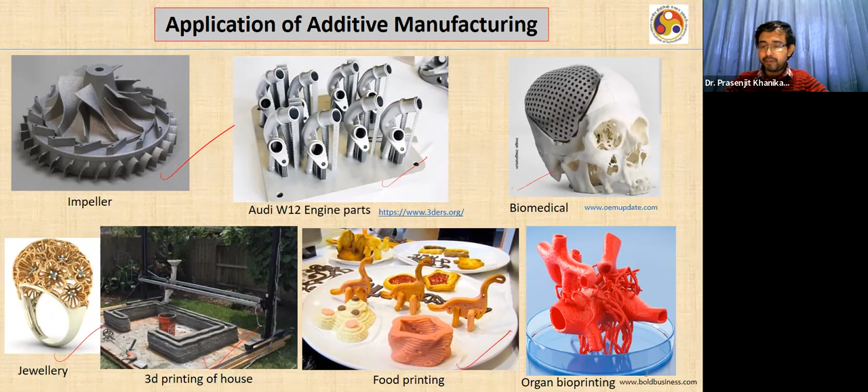And then a very interesting field is organ bioprinting. There people are actually printing organs with biological materials. So I'm sure that all of you are aware of this. I will just show you different kinds of metal 3D printing. There are also different kinds of polymer 3D printers. So I'll just show you a video.

Is the video showing? I mean, voice is not required, but the video is going, right? Yes, yes, indeed. Okay.

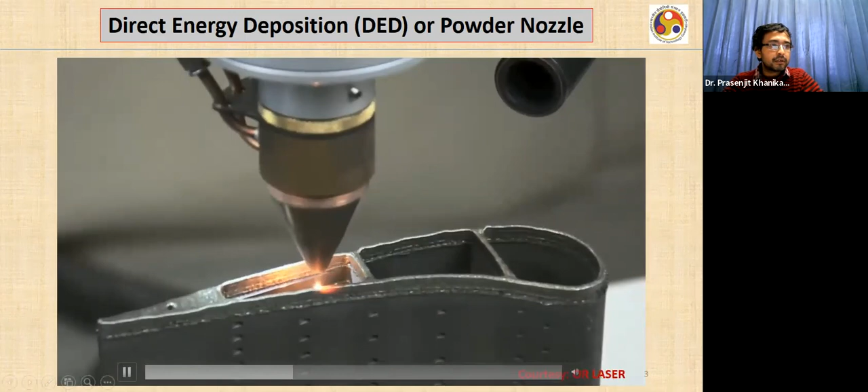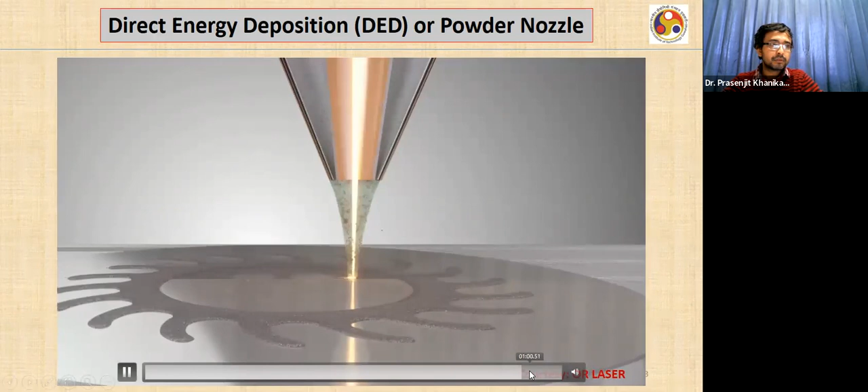Sorry, this is one method that is called direct energy deposition or direct metal deposition, or it is also called the powder nozzle based technique. So you have a laser. If you can see that light inside, you have a laser, and then you have metal powders coming from this nozzle. So that is one technique.

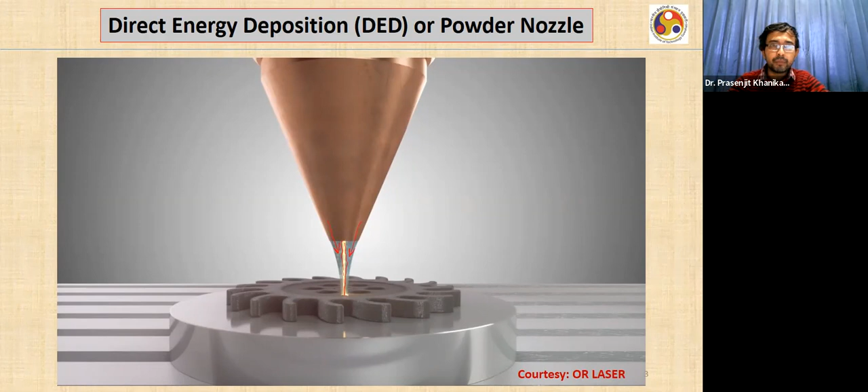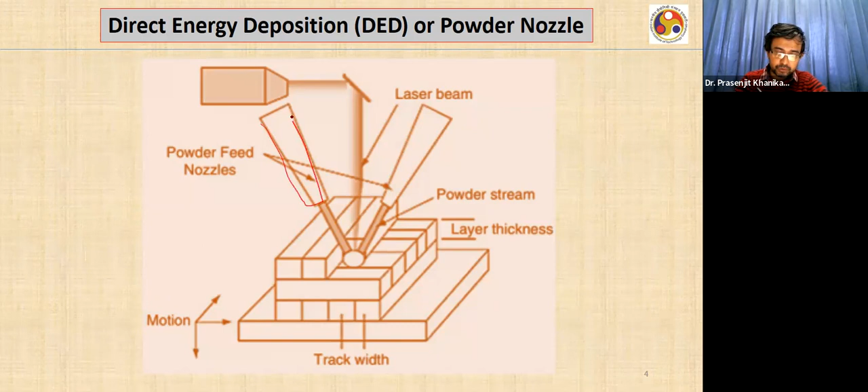But the printer we have in our department is a different one, because for some complicated shapes this doesn't work. But this is better for repair work compared to the other technique. So if you have, let's say, a gear or that kind of part, and it is broken and you want to repair it, this is a better technique. This slide is not very important, but again, they're showing the powder nozzles. You have nozzles here and here. There can be more than one nozzle, and then you are building the part.

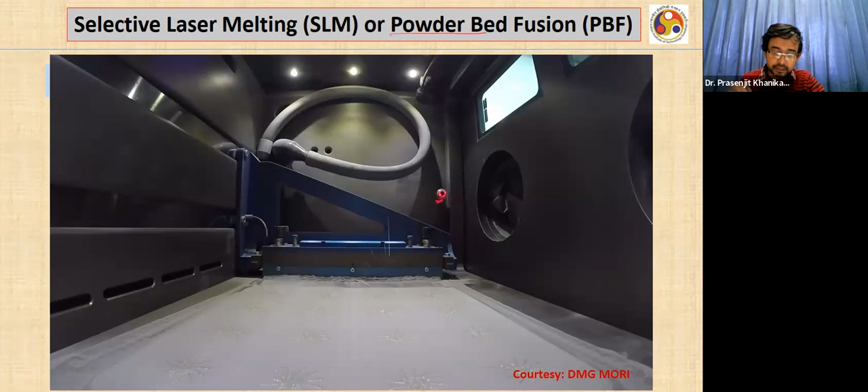But another technique which we are more interested to study, because our metamaterials can be made by this technique, is called selective laser melting, SLM, or powder bed fusion. The other one is called powder nozzle because the powders come from a nozzle, but here we have a powder bed. So this is the bed, and you have powders. You cannot see these powders; they are very fine, at the micron level, let's say 50 micron, 30 micron powder size. So this is again a video.

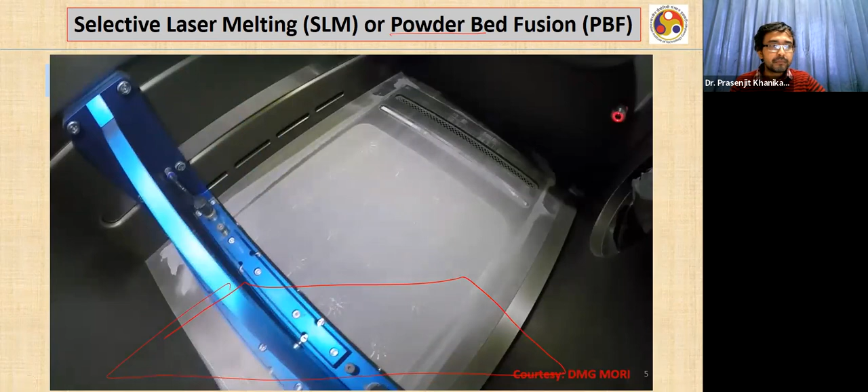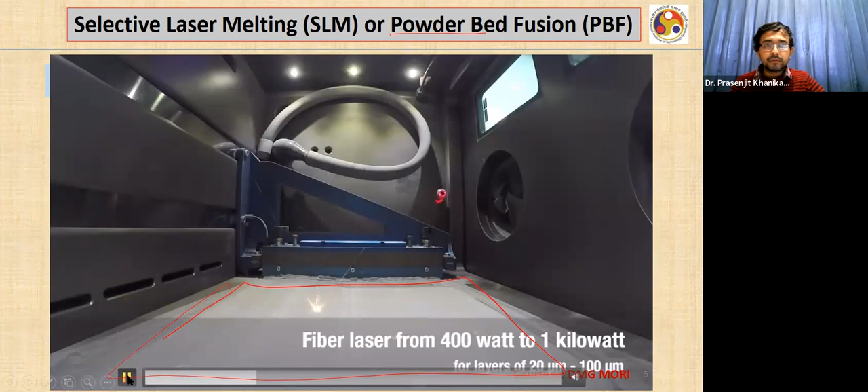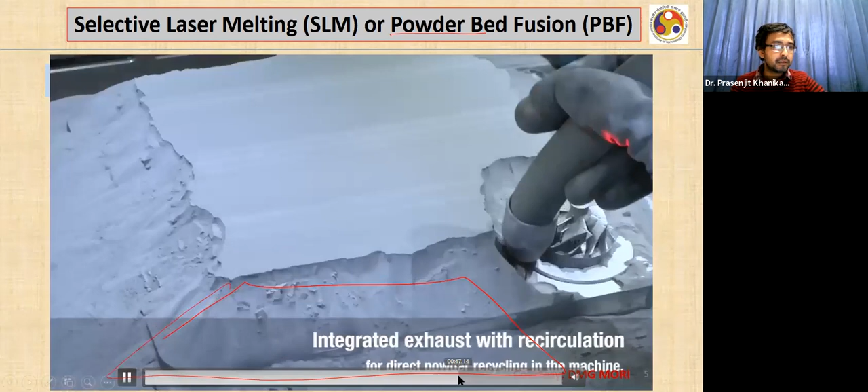This is the product we are making, let's say metamaterials or whatever product, a gear or whatever. This bed will go down. After one scan of the laser, this is the laser pointer, the recoater mechanism works. After one scan, like the wiper of a car, the recoater will go and remove the extra layer of powder. But anyway, we don't want to discuss the mechanism much.

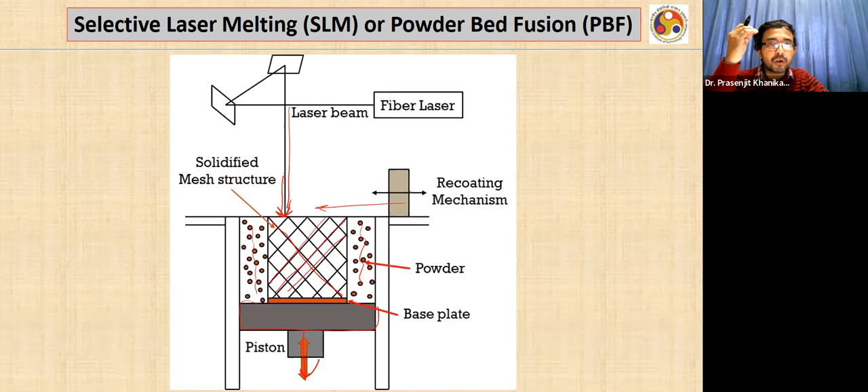But what I wanted to tell you is that selective laser melting or powder bed fusion is a better technique in terms of complexity of parts. Higher complexity can be achieved here. There are different kinds of classifications you will get in textbooks. This is one. This may not be exhaustive; there may be more techniques, but we are only focusing on metals.

As I told, we have SLM, sometimes called SLS as well. I have shown first DED, which is powder nozzle, and I have shown SLM, which is powder bed fusion. There is another technique which is also mostly powder bed, but it uses an electron beam rather than the laser. So this is another technique. But we are more interested in SLM because we have the printer in our IIT Guwahati.

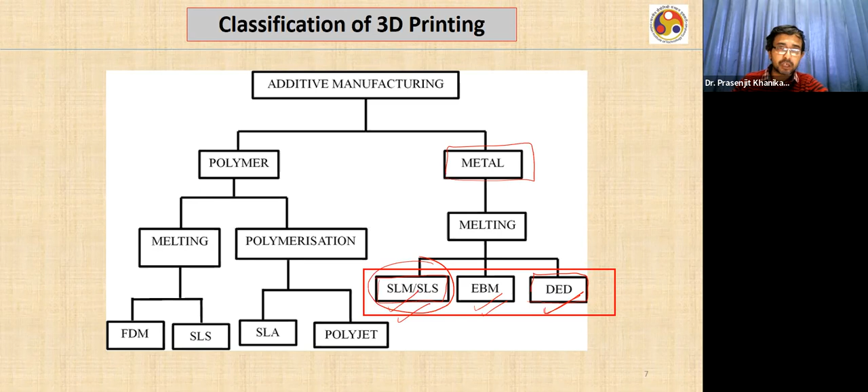So we have the printer, although it is not installed, and also we can make the metamaterials with SLM. EBM also can be used, but that is an even costlier machine, and there are some advantages in EBM. There are, I think, very few EBMs, electron beam melting machines, in India. So I will go quickly. We don't need to understand all of them.

I'll just go quickly. What are the process parameters in powder bed fusion? That is the technique we are interested in. So in powder bed fusion, these are some parameters. Let's say laser related parameters: the laser power, spot size, pulse duration, pulse frequency, and then how you scan it to make the part. Scan means scanning by the laser. So there are some parameters.

What is the speed of scan? What is the spacing of scan? And what is the pattern? Like you are doing like this, or you are doing it, let's say, a little differently. You can do that kind of scanning as well. So those are very important. And then also, what is the particle size, that powder size, what are the material properties of the powder, and then temperatures.

Why are these important? These are very, very important because these 3D printing companies took years to decide on these parameters. Let's say one very common material, SS316L, that is stainless steel 316L, is probably the most common material for metal 3D printing. For that material, what powder size, what laser power, what scan strategy will be good. So these companies did research for maybe a few years to get an optimized value.

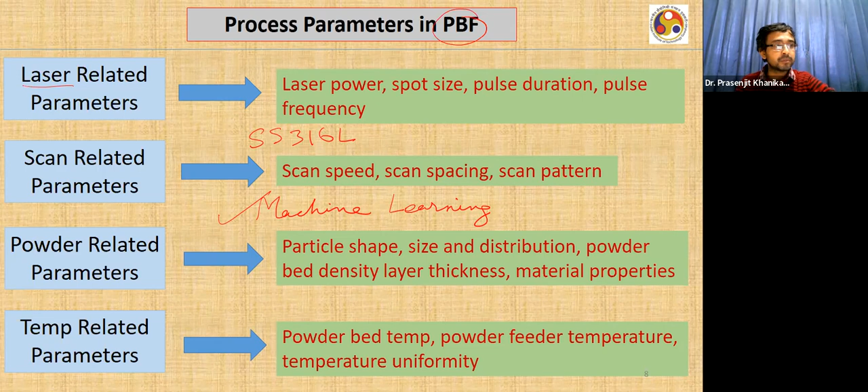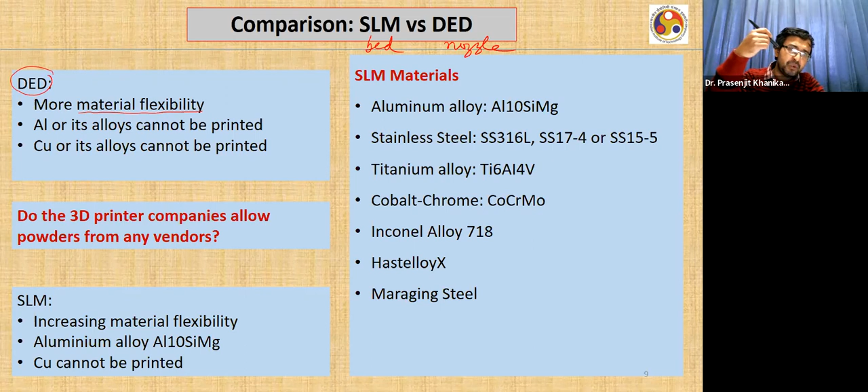So now again I'm coming to this comparison of SLM and DED. SLM is the powder bed. I'll write bed here. And the other one is the nozzle, the first one I showed, where there are no powders on the bed. So the important point is that you have more material flexibility in the other technique, the nozzle technique. That means you can actually use different kinds of materials. But here the material flexibility is not much. You have only special kinds of materials.

Let's say one common material, as I told, SS316L, this kind of stainless steel, titanium alloy, cobalt chromium, Inconel, Hastelloy, maraging steel. These are materials for which companies have recently optimized the parameters. More materials are coming in, but not any. It is not like you take any kind of material, make some powder and put it in the 3D printer. You will not get a good product. It will break easily, or it will have a lot of porosity.

But then for some materials, even aluminum and copper, DED has some difficulty. We are not going into that. DED has some difficulty; it cannot print these materials. Now I think it is developed. They are developing this, but at least a couple of years ago they could not melt or could not print it properly. So this is one thing which is probably not required.

But earlier, these companies did not allow powders from other vendors, but now they are allowing. The advantage of the SLM technique is that it has increasing material flexibility, although it doesn't have as much flexibility as DED. But aluminum alloy can be melted, copper cannot be melted, and also, which I have kept in the next slide.

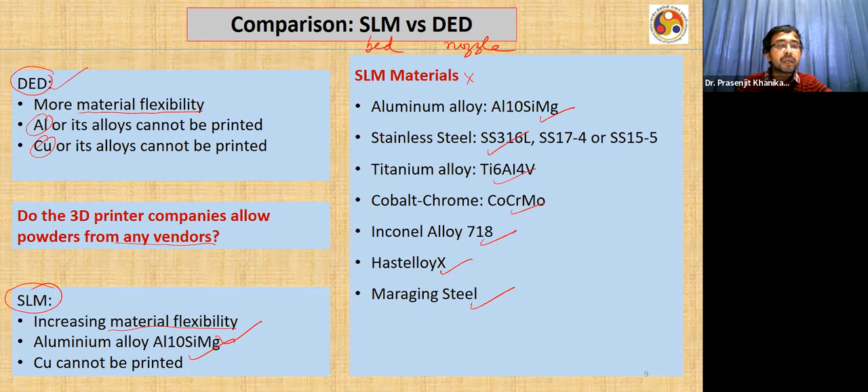So I think the complexity of the products. Some of the products, like this kind of porous structure, can be very difficult with DED. With the powder bed it is easy. Let's say this kind of structure also, maybe DED may have some difficulty.

So suppose you need to make inclined rods, let's say a cross sign inclined, and you are printing in this direction. Then probably your SLM powder bed is a better process, because you have the powder in all the places, so it will have good support. Otherwise in DED it is difficult.

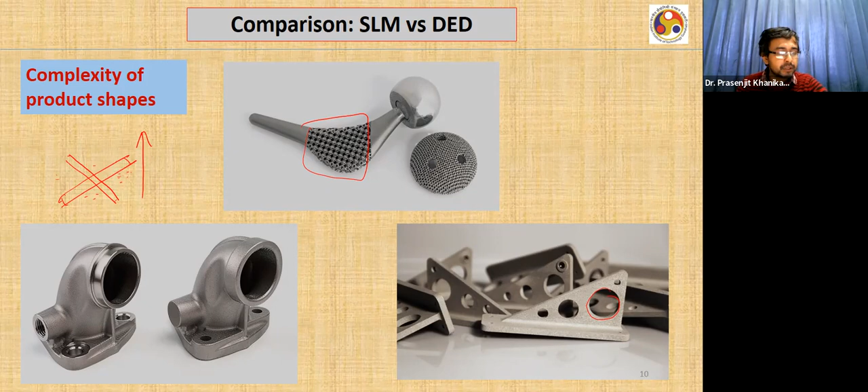We are not going into that much technical detail here, but you should understand that SLM is a better technique for complexity of the parts, and DED has more material flexibility, although it has difficulty with aluminum and copper. I already told you the porosity is higher, which is not desired. If you have small pores inside, small voids, that is not good. Here the porosity is less, which means density is higher.

The cellular structure, which is the metamaterials I told you about, can be done only with SLM, which is powder bed. I will write bed here so that you understand. And this is the nozzle one. Other things are not very important, I think, but this wall thickness may be important. One is called layer thickness, one is called wall thickness.

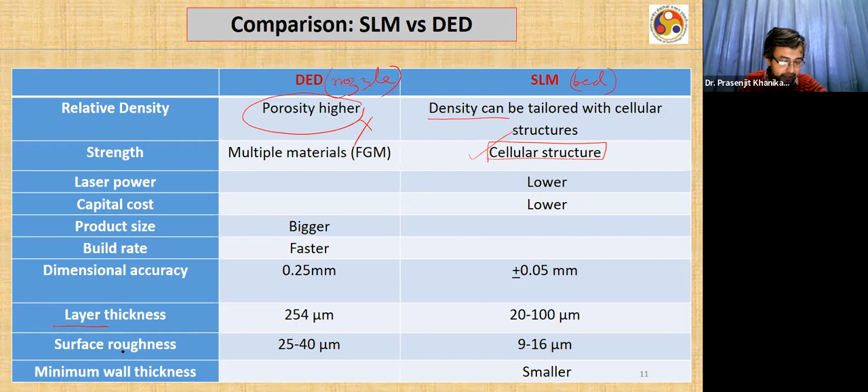Let's take an analogy of making a wall. The height of the brick is your layer thickness, just like you are making the wall by putting bricks one by one. Similarly, the laser scanning will be done layer by layer. So that is the layer thickness. You see, the layer thickness is smaller in SLM.

Similarly, minimum wall thickness is the feature thickness we can make, how thin the wall can be. Can you make a smaller wall? Yes, here we can make a smaller wall, which is better. Then we can get smaller complicated structures.

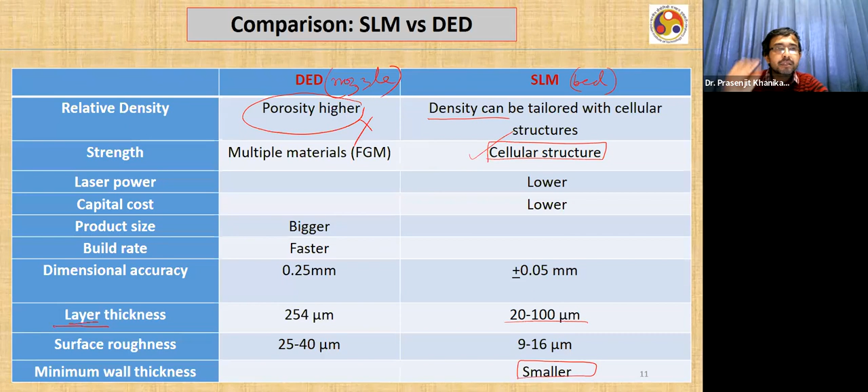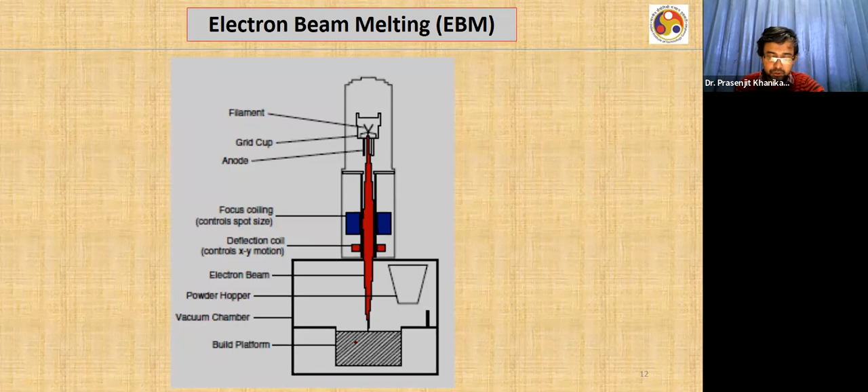This is another technique, electron beam. We are not much interested in it now. Electron beam also uses a kind of powder bed. I just want to tell you a few things. There is the big table, sorry, I did not remove all of them. But the scan speed is very fast in electron beam melting.

Selective laser melting, the powder bed, uses the laser. Here we have the electron, but this machine is very costly. For SLM, what we got is 3 to 4 crore rupees. Electron beam melting should be costlier. I'm not very sure, but it should be more than 10 crores, or maybe even 20 crores. I don't know the price right now, but it should be costlier.

So the scan speed is very fast, which means you can make a part very fast. The energy cost is also good, but the surface finish is not as good as SLM. And feature resolution, how small a feature you can make, is also better in SLM. With SLM-type techniques you can melt not only metals but ceramics and polymers, but here you need conducting metals. Anyway, we are not going into other parameters.

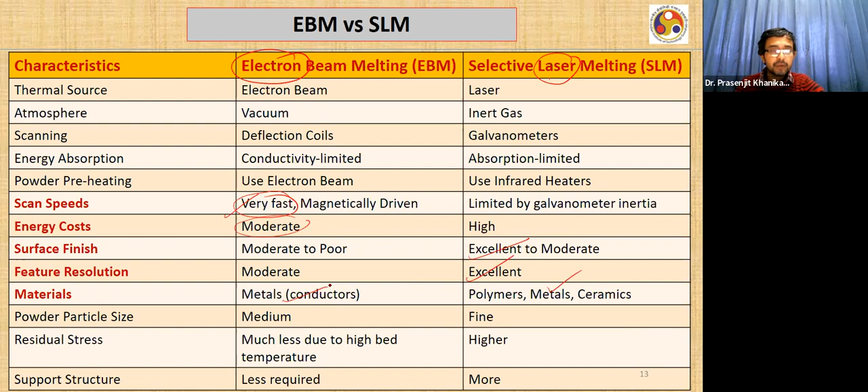You don't need to go into details, but the grain structure is different, so the mechanical properties will be very different. That's what we need to understand, and the porosity is less here. That is the advantage of electron beam melting.

Now coming to the history of this. Selective laser melting was developed in Germany at the Fraunhofer Institute of Laser Technology in 1995. Then DED was developed at Sandia National Lab, US, and commercialized by the company Optomec, which had their first machine in 1997. Then EBM came in 2001, in Sweden, at Chalmers University of Technology.

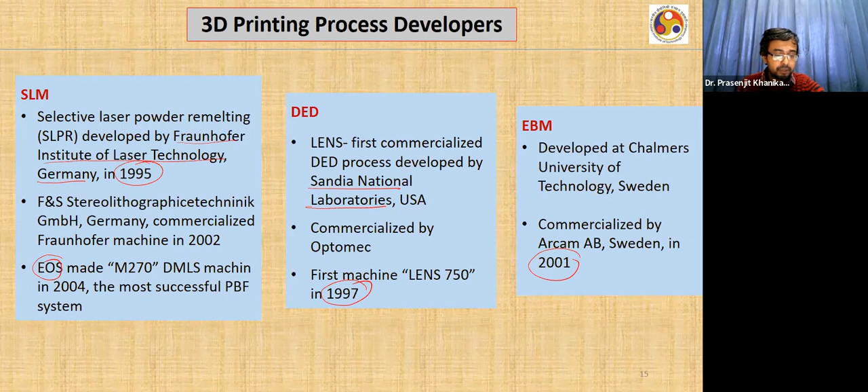But then EOS is a company which is very well known. They made this in 2004. And then the other kind, this is mostly SLM companies. I will show you these companies.

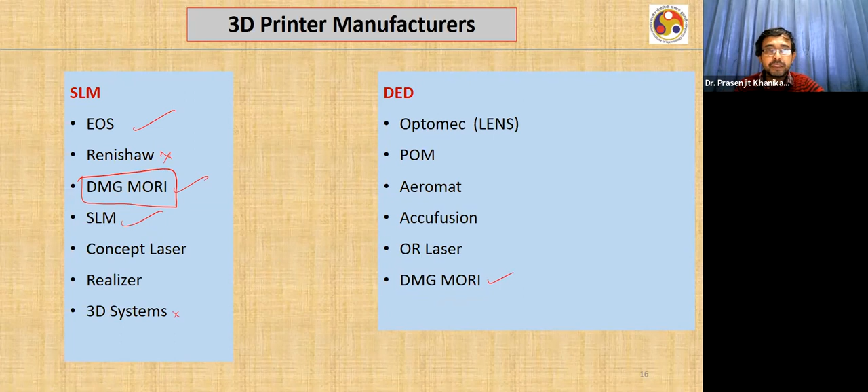I just want to tell you, this isn't required for this presentation, but most of these companies, I think, are from German companies. This may be from the US, and Concept Laser or Realizer may also be - I forgot exactly - but this is from UK. And DED companies like DMG make both DED and SLM. We have a DMG Mori machine, an SLM machine, which is also a good company. But then Optomec and other companies are American. The SLM technique was developed in Germany, so the good companies are from Germany.

So coming to the second part. As I told you, in metal 3D printing I'm not an expert, but we are interested to learn because we got the printer just a year ago - in February last year - although it had not been installed yet. But we want to study the metallurgy of it. I will show you a couple of slides on the metallurgy - how the grain structures are, how that can influence the mechanical properties. Why it is important, I will tell you later.

This is still underdeveloped - making metallic parts with 3D printing doesn't have very promising properties yet, because it is difficult to control the microstructure, control the metallurgy of it. So this is the topic I am interested in, and most of my students are working on it.

This is what we also call metamaterials - not only mechanical metamaterials, but also optical metamaterials. If you go to the physics department, or electrical department, or even chemical, they have optical metamaterials, electromagnetic kinds of metamaterials, or materials with negative refractive index. Like here in mechanical, we have negative Poisson's ratio.

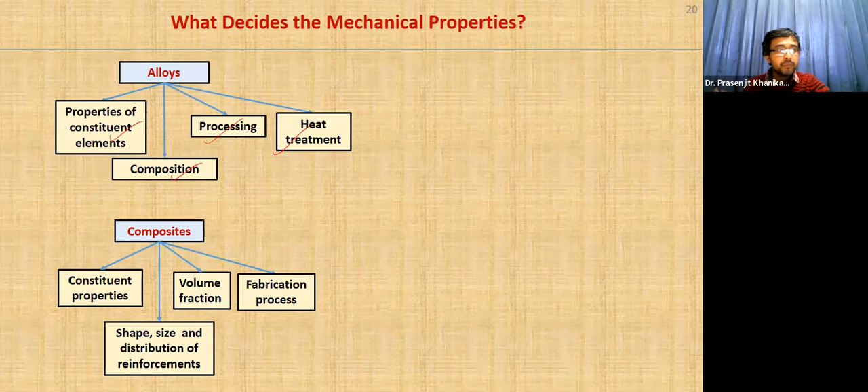But if you talk about composite material, what is important - composite materials are like fibers or particles put inside, let's say in a polymer matrix, and then you put some carbon fiber or something, that gives a better property. So these constituents' properties, and then how much volume fraction of fiber or particles you are putting, and then the shape, size, and distribution of the reinforcement - whether it is fiber or particle. And then the fabrication process.

But now we are coming to woods. What factors decide the mechanical properties? The cell topology. I think I did not tell you, but what is a cell, right?

So for wood, you see how the cell topology is, how the shape is, and then how much cellulose, how much hemicellulose, and how much lignin is there, and what is the crystallinity - some of you probably know crystalline and amorphous material. How crystalline is that cellulose? I'm not an expert on that, but anyway, that is also important.

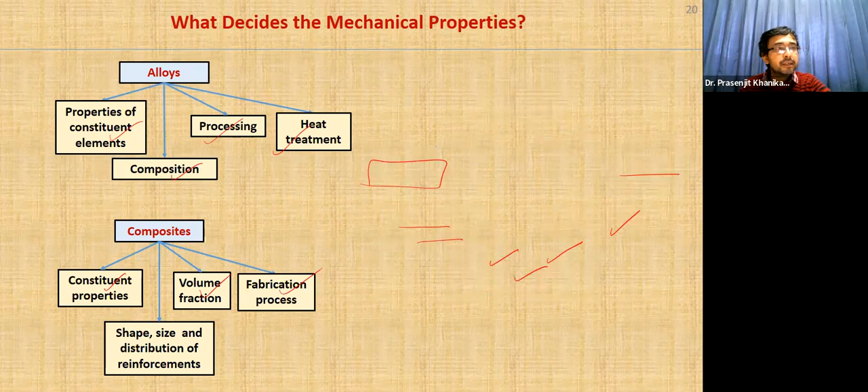And then how much porosity is there? As I said, 25% relative density means 75% porosity. Higher the porosity, lower the strength, but it will be lighter, right? And also the microfibril angle - I've shown you that is also very important, how much the fibers have an angle with the vertical, in the growing direction. That is very important.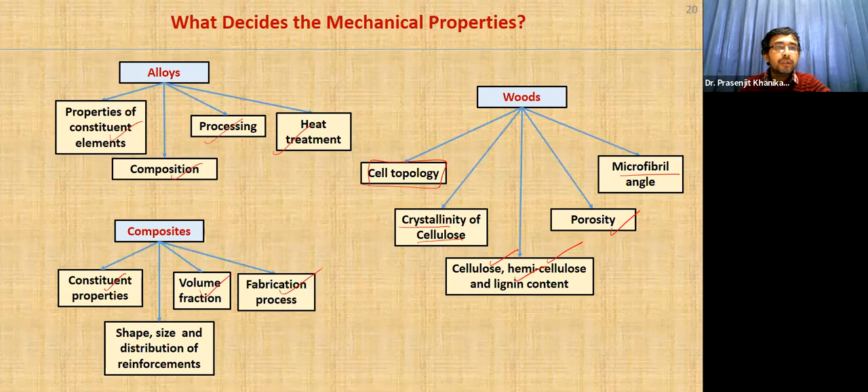Here the honeycomb is very interesting. I think 20 years ago, one mathematician proved what's called the honeycomb conjecture - earlier people could not prove it - that if you have an area and want to divide it with some spaces, making a hexagon gives the lowest perimeter. If you make a square or something, it will not be lowest. But honeybees have known this for millions of years - that is the best structure they can make, because the perimeter will be less, they will need to work less, and make a good structure. The mathematician proved that only about 20 years ago, but they knew it from millions of years ago.

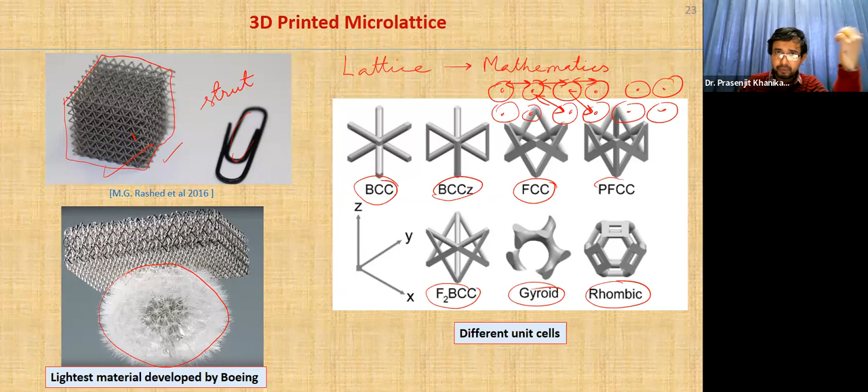We could not - I mean, my students also made something, but it's not that light, because they have better technologies. I think this kind of structure was made even 10 years ago. One is polymer, then a metal one they made in 2015. They're saying that it's the lightest material.

Why do they put it on the flower? Because the flower is a very light kind of flower, right? And it can even bear the weight of that lattice.

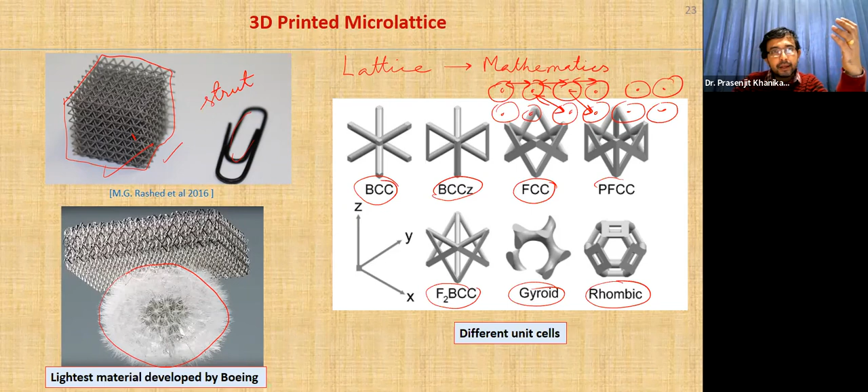So what is the advantage of these lattice structures? As you can understand, they are very, very light. They may not carry the kind of load a solid structure can, but the strength-to-weight ratio, or stiffness - sometimes called Young's modulus, elastic modulus, an indication of stiffness - that strength-to-weight ratio or stiffness-to-weight ratio is very good in these materials.

So now again, we will show different kinds of structures. People have come up with different kinds of structures - cubic, and so on. These are all not crystal structures; these are structures people wanted to make as materials which are very light.

But then if you change these different kinds of unit cells. We call these unit cells because they are the building blocks, like you make a wall with hundreds of bricks. So this is, let's say, one brick, and you put bricks one on top of each other, and then you can make the entire lattice. The lattice is actually the entire thing, and the one building block we call a unit cell, which can be repeated to form the entire lattice.

There are some surface based ones also. These are rod kind of, as I told, strut based. Oh, sorry, it is written here strut based, but these are rods. And the others are surface, not rods. It's like a plate or maybe curved plates.

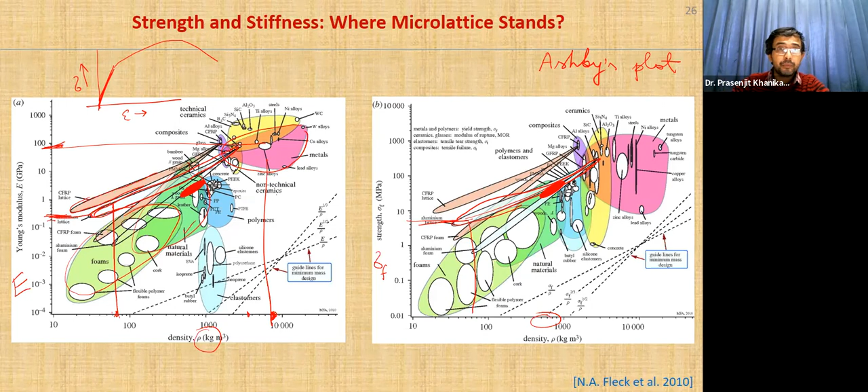Although strength is low here, the density is also very low. So that is important: very lightweight structure. For aeroplanes, we need very lightweight structures. But some of the potential applications, you must be wondering, because these types of materials you have not seen yet, right?

Yes, it is actually very difficult to convince you, but this type of materials, these mechanical metamaterials, have very little use now because of the cost of the 3D printing process, and also probably the other thing is the materials, especially for metallic materials, it cannot achieve very good properties, especially mechanical properties.

When you have blast heating, or let's say a vehicle crash, if you apply this lattice structure, then it can absorb a lot of energy. So people actually use foam. Foam is easier to make, and its cost is less. That's why people use foam in some of the structures, but not 3D printed structures, because it is very costly now.

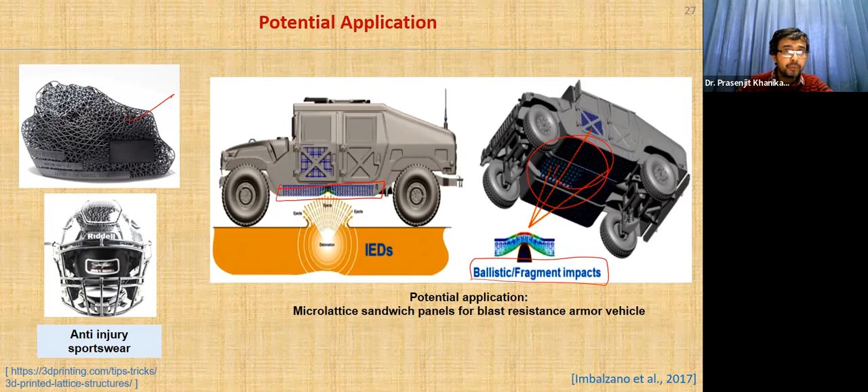So basically, this kind of material has a lot of potential, but the only problem is that now it is costly. And in some aeroplanes, at least, they were using this kind of materials. But in future, surely in a lot of parts in aeroplanes, because we need a lighter structure, especially for fuel economy, and also sometimes for energy absorbing capacity, like, let's say, a bird hit.

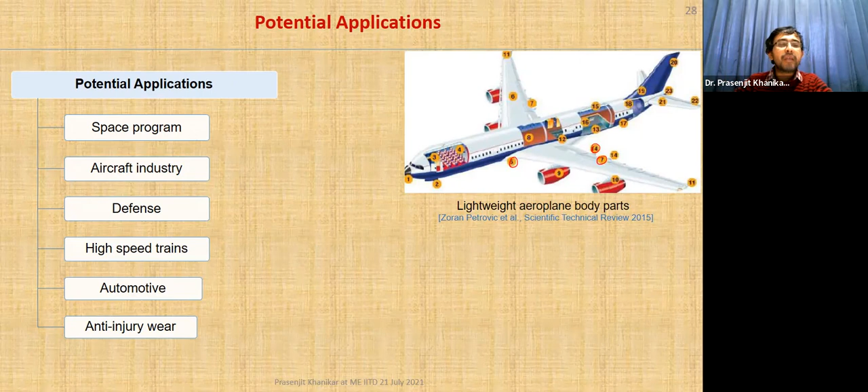I mean, if two planes collide with each other, then it will be very difficult for any kind of material to withstand that collision. But let's say some kind of light hit, like when it hits a bird, then you need to have a good kind of material that can absorb energy. Absorbing energy means it doesn't transmit to the other part of the material. Like in a car crash, the frontal part should absorb the energy. It should not transmit to the main part where the passengers will be sitting, right? So that kind of structure is required even for aeroplanes, for light hits.

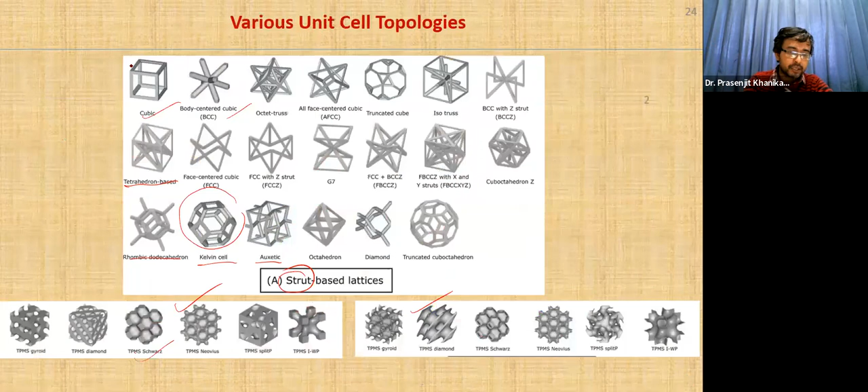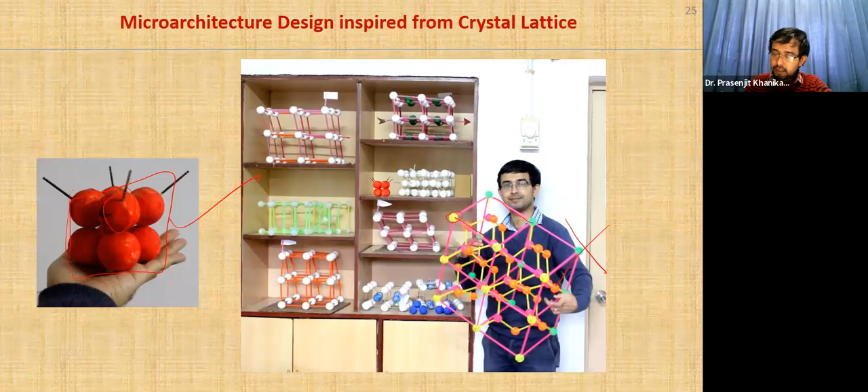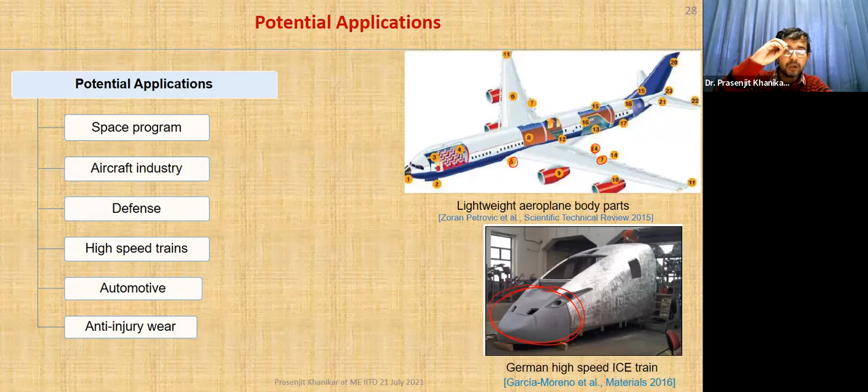Micro-lattices are smaller ones, smaller rods, and similarly these are honeycomb structures they are using, which is also basic. Honeycomb structures and foam structures are kind of basic structures which are the same metamaterials, but they are not 3D printed and hence they are less costly. But if you can make 3D printed lattices, then you have more control. You can have any kind of lattice, FCC, BCC, or whatever, so you can have better control over the properties.

So here, vehicle crash box, right? A vehicle crash box you can make with this kind of material, and especially anti-injury wear. I have shown you the helmets, right? And high-speed trains, even defense applications, as I have shown, in blast resistant vehicles. It is even possible to use it in a bulletproof jacket, but you need to make a very thin lattice that may not be possible with some kinds of printer.

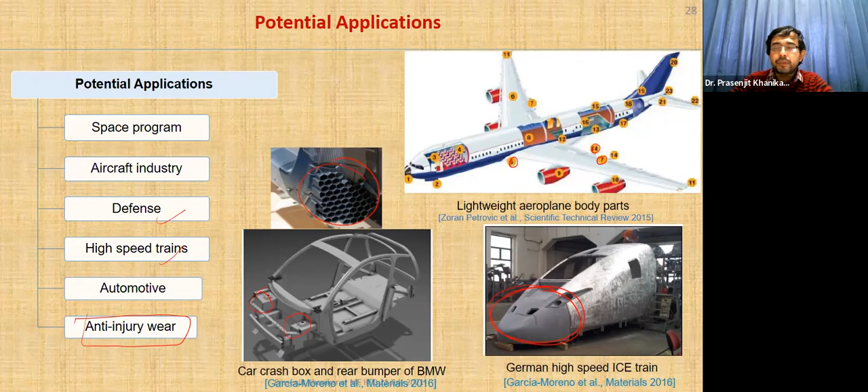Then you see this is damaged, kind of compressed. So this is stretching dominated. So if you draw the stress strain curve, I have shown you, right? If you draw a stress strain curve of a solid material, not a micro lattice material, then your stress strain curve generally goes like this, a straight line, the elastic portion, and it goes something like this, the engineering stress strain curve. But in this case, that is the difference, why it can absorb a lot of energy. It goes like this, but then it goes flat. It is called the plateau region.

Solid materials will probably have higher strength, but the strain may not be that high, so the area will be less. Here in this case, we will have higher area. So this toughness, you can use the word toughness, or energy absorption, is high. That's why for crash resistant vehicles, maybe crash resistant aeroplanes or blast resistant vehicles, you can use these kinds. But the only problem is now the cost is very high because of the 3D printing processes.

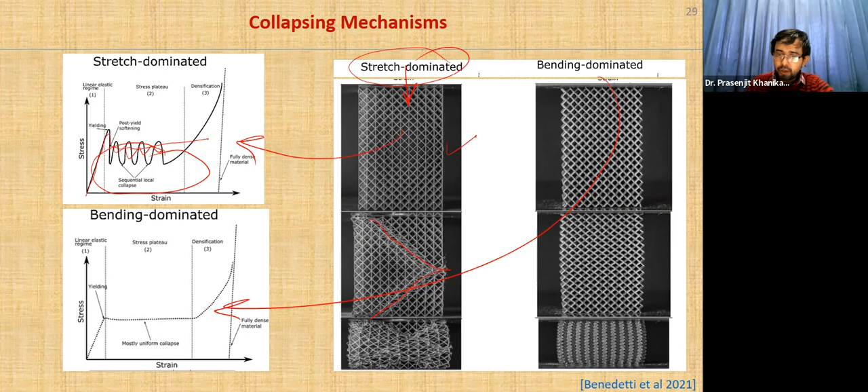This is in, just give me a second, this is in percentage, right? So how much compression will happen. Let's say you have the lattice something like this, and you compress it. It is compression only. This is how much it is compressed. Let's say 20% compressed. That means the lattice will be something like this. That 20% got compressed, right?

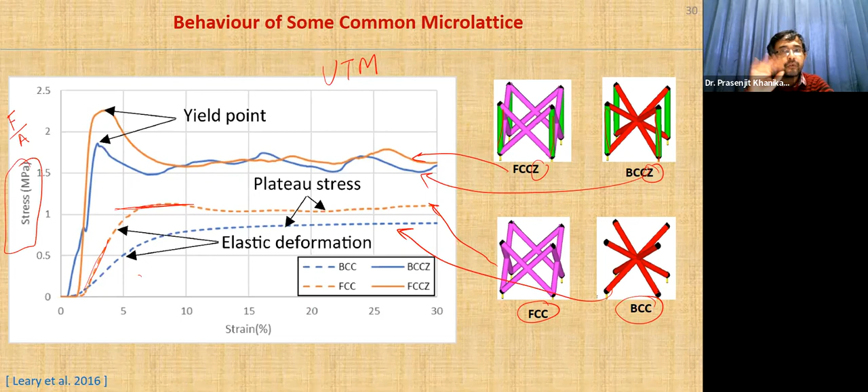The stress strain curve is very important because from the stress strain curve you can tell what is the strength and what is the stiffness. What is the slope of this curve? Somewhere here you can get the stiffness. What is the strength? Strength is the stress it can take. So strength, stiffness, and also energy absorption, all these things we can get from these kinds of curves.

Again, there are some mathematical equations also, the Gibson models I told you about. We are not going into details of that. They have made some very simple equations. They are saying that rho S is the density of the solid material and rho star is the relative density of the material. We are not going to discuss how much is porous. Depending on that, you will get the rho star.

Some researchers come up with some equations, and that can give actually quite good prediction where these points will lie, where the strength relative to density or where the stiffness or modulus relative to density will lie. They can actually tell, irrespective of the structures. But anyways, some structures, let's say BCC, are better than FCC.

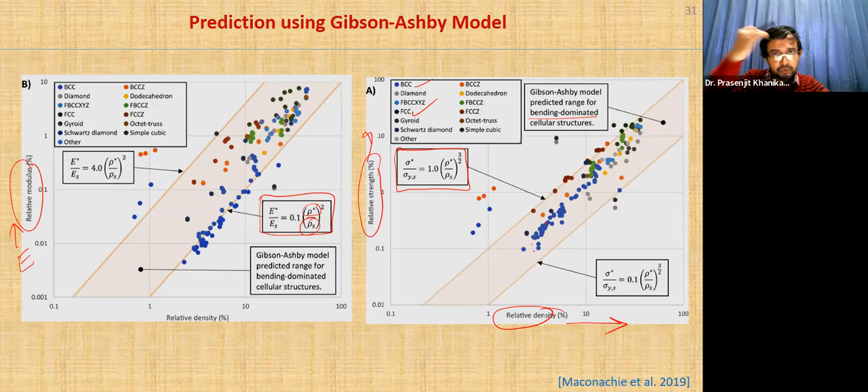So that's why we do research to get a good design of that unit cell. So that is very important. And still people are doing research to get better and better unit cells, to get better and better mechanical properties. So this is another important property which is interesting.

So if you take a solid material, and let's assume this is a square, and you try to compress it from both sides, or let's say this is fixed and you compress it, the final structure is something like this. The height will be reduced, but it will expand. That is the lateral deformation, right?

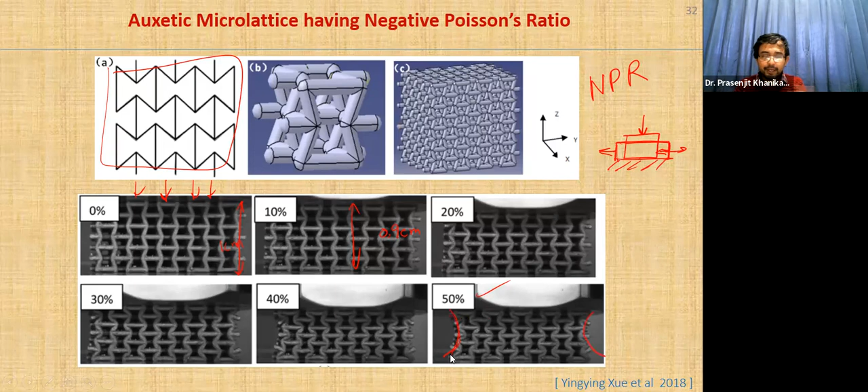How much is the lateral deformation divided by your longitudinal deformation? But here in this case, the Poisson's ratio is negative. That means the lateral expansion is not happening. When you are deforming, this is actually going inside. It should go outward, but it's going inside. So the design is like that. This is called a re-entrant kind of lattice, not like FCC, BCC.

By the way, if you deform more, it will go out. Only in the beginning it will shrink in the lateral direction, but maybe after some time it will expand. But till some point of the deformation, it will go inside, because when you are compressing from the vertical direction, the horizontal direction should expand, but it is going inside. So that can be sometimes very useful.

And also the indentation resistance, when you indent with, let's say, a cylindrical kind of projectile, or let's say bullet impact, I think it has a better property than the other kind of lattices.

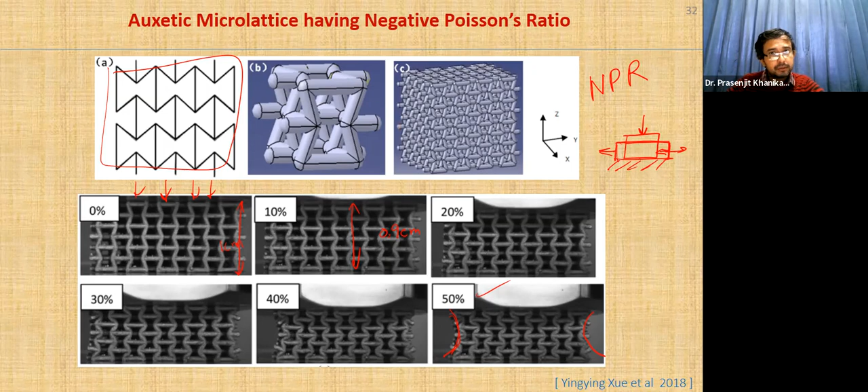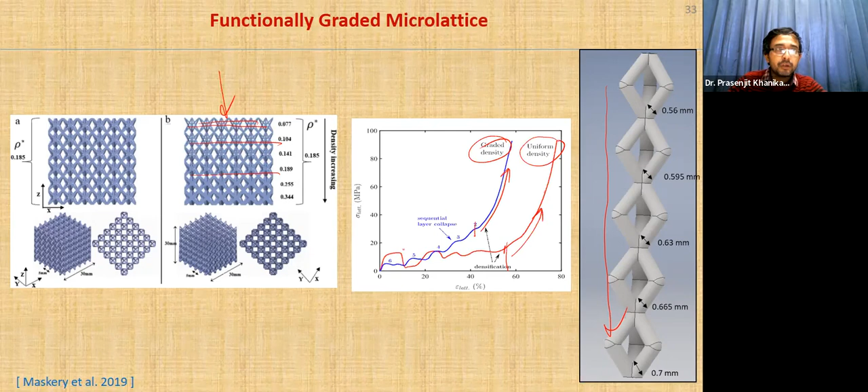And I probably did not tell you in the previous slides, but at the last portion, at this point, we call it densification. The struts will come close to each other, like a solid material. Initially there are pores inside. When you are compressing it, at last the struts will touch each other. That will make the material more like a solid material. That's why the strength will increase.

But the energy absorption, how much energy it will absorb, we generally calculate only this part, not after that part. So there are different kinds of lattice structures people have made, very different, very complex structures.

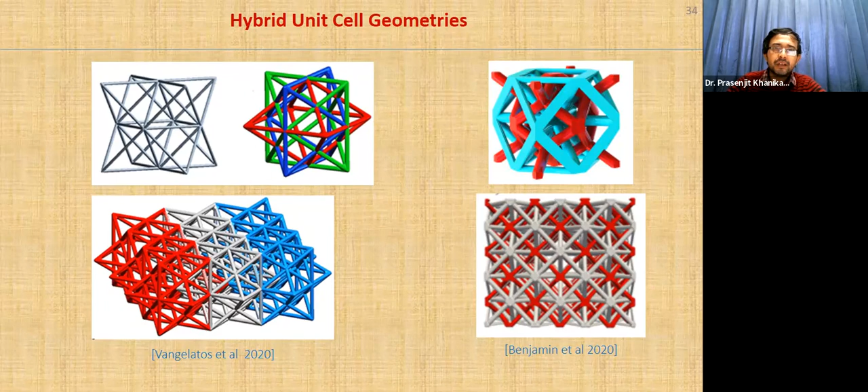So what we do now, I will show you at last. I will show you some of our research. There are a lot of slides. Anyways, I will skip, don't mind. One area is we work on high entropy alloys, which is a very special kind of alloy. If you are interested, please study that. That is a very new class of alloy. It's a very good future prospect.

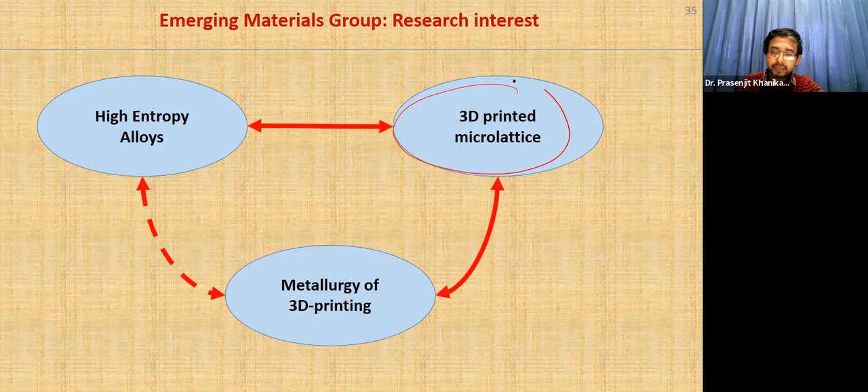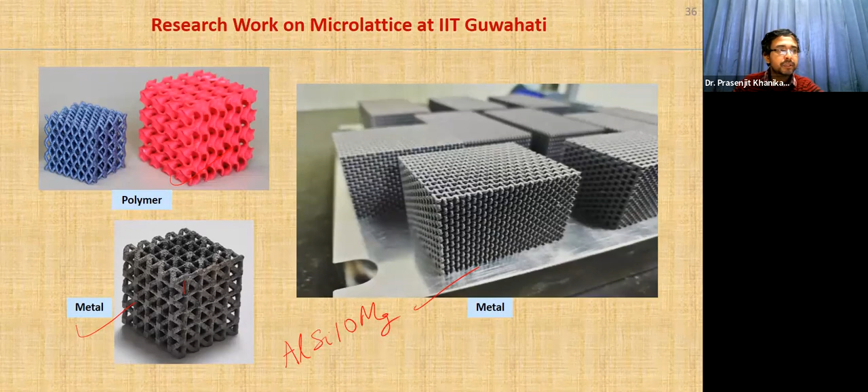And then we do 3D microlattice, which I call a metamaterial. And then we are now working on metallurgy of 3D printing, and these are actually connected. But anyways, these are the structures we have made. This is metal. This is also metal. These are polymers we have made. Although if you see from a close view, these are rough. The metal is not steel. Aluminum, AlSi10Mg. So it is mostly aluminum, 10% silicon, and less magnesium. So that kind of material. This is a little brittle.

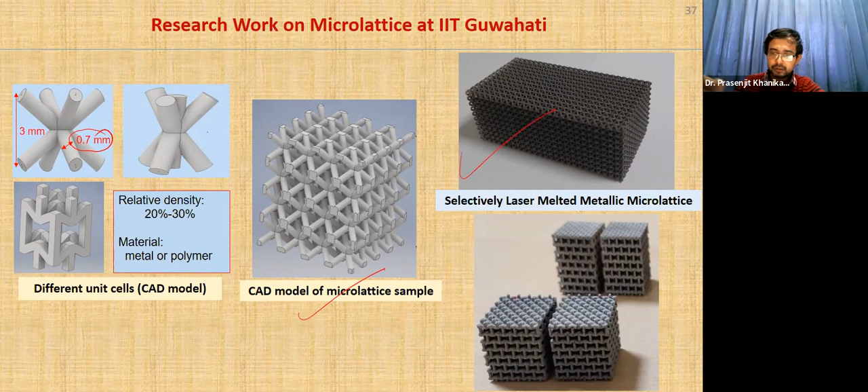So why do we call it microlattice? Let's say these are 700 micron or 0.7 mm diameter rods we use. Generally we use this kind, or sometimes even 0.5 mm. So that's why it's small. We call it microlattice. You make a computer model, and then you give the computer model to the printers. They can print. We made this metal lattice outside, outsourced to some company, because our printer is still not working. So I will show you just a video for the metal lattice, how we get the stress strain curve. These are the stress strain curves we got.

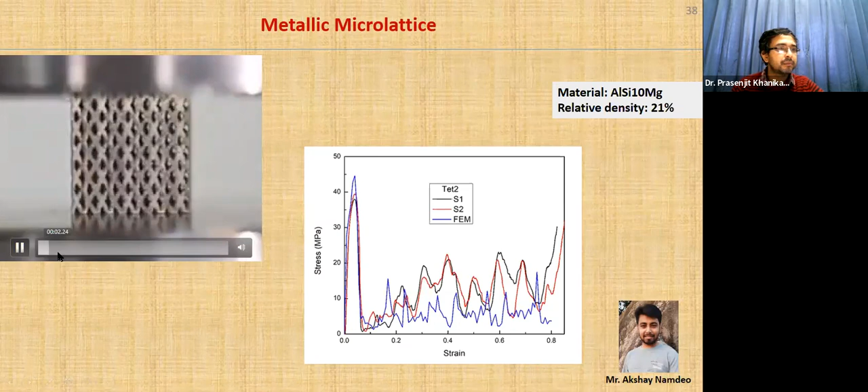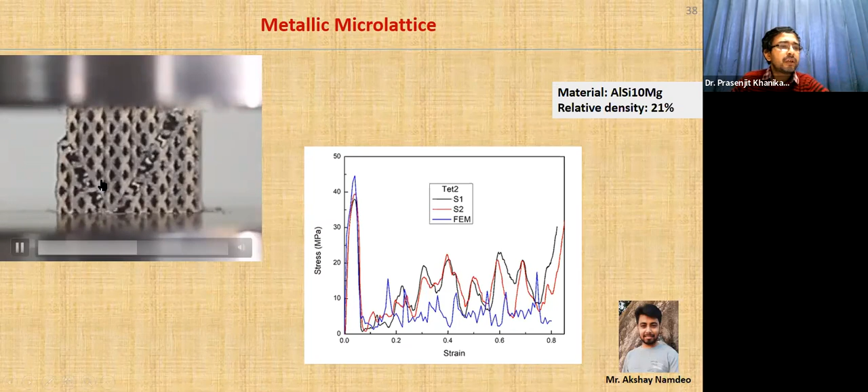One of my PhD students, Akshay, has done that. But this is a little brittle, so it breaks like this when you compress it with a UTM, universal testing machine. But this is a polymer. This is more ductile. It's a PA12 polymer. PA12, this is a nylon. And then I just want to show you. Don't need to bother about all those stress strain curves.

But we use the finite element method, FEM, to do the simulation. And then see, this is experimental. This is the real one from experiment. So they are looking the same. So finite element gives a very good prediction. First, we do finite element simulation to see whether this structure will be good or not. Then we go for experiments. I just want to show you the video again.

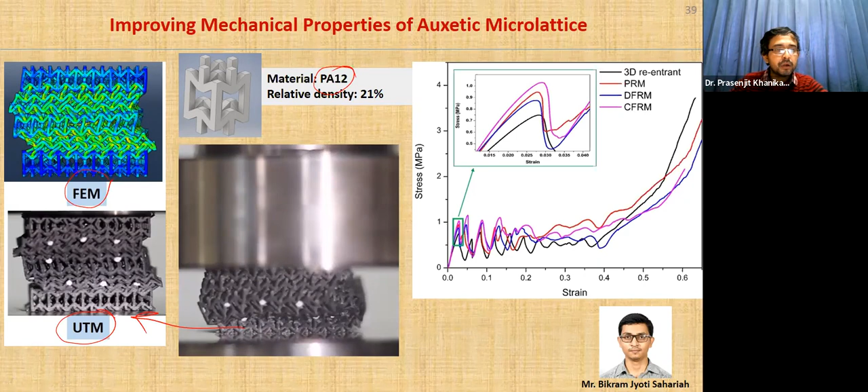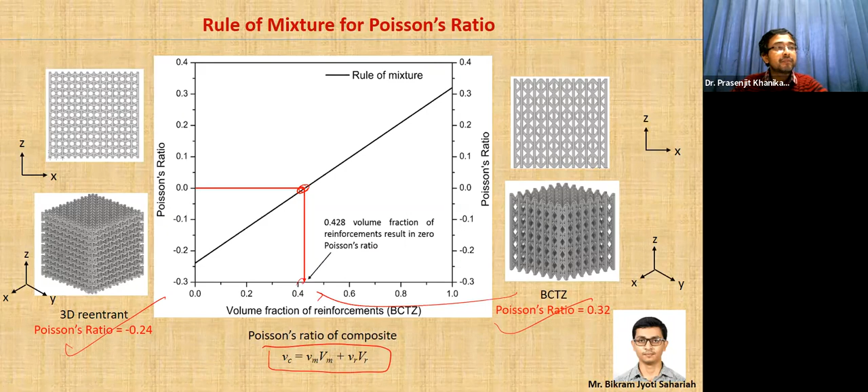This is another PhD student of mine, Bikram, and he did another interesting thing. We are going to submit this work also; other work is already almost accepted. For the first time we have done this. For the Poisson's ratio we used the rule of mixture, which is used for composite materials. So we used positive Poisson's ratio and negative Poisson's ratio materials, and we predicted that if you put 42% of this, then you will get a 0 Poisson's ratio. Nobody has done that. Although it looks obvious, this is very interesting. With the help of this, my student got a 0 Poisson's ratio.

What is a 0 Poisson's ratio? When you compress the material, it will neither expand nor contract or shrink in the lateral direction. So he made this kind of lattice structure, but the earlier lattice structures exist in the previous literature. Somebody else did them, maybe from the US or Europe, China. So these are the structures people have made. These are very interesting, very complicated structures.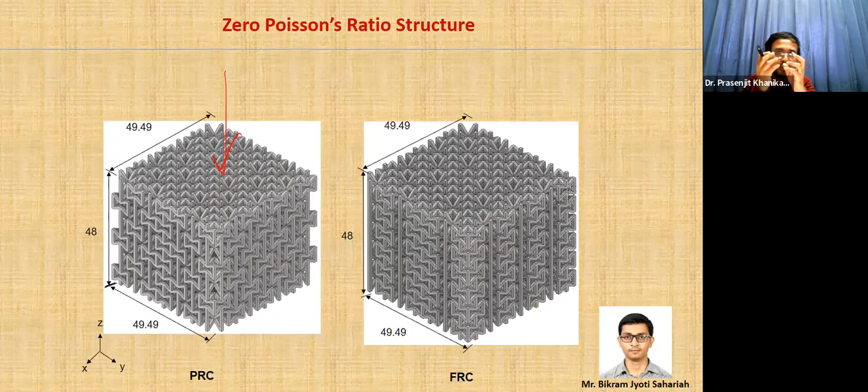That means our structure has the same weight, and we have zero Poisson's ratio. We call it ZPR. Other structures also have zero Poisson's ratio, but our structures are better because we mix it together.

We call it a composite. Actually, we were inspired by composites.

Nobody has done this with respect to Poisson's ratio. Some one or two papers are there for Young's modulus. We mix it together, and we can predict that mixing together will give us a better result.

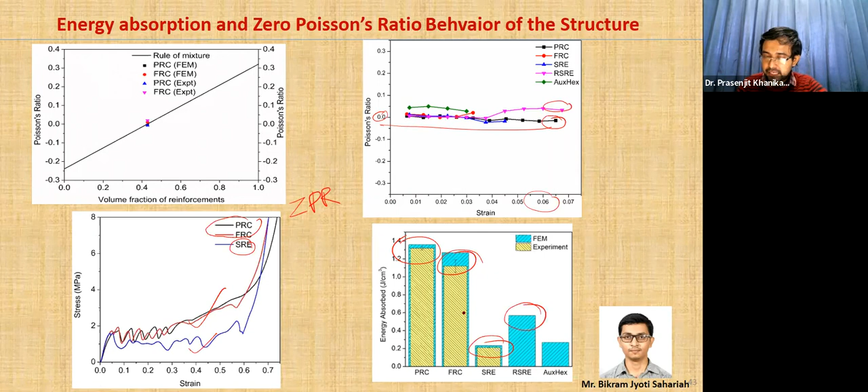Although this RSRE is doing well, the energy absorption is less here. But anyway, another work - my other PhD student is working on this - is a plate structure. We are putting a plate structure with strut lattice. This is the plate structure, and these strut lattices are the most common lattices.

But then we realized the plates with the same relative density, meaning the same weight - if you take two, one plate and one strut lattice, the plate lattice will have higher strength and stiffness. But the problem with the plate lattice is if you repeat these lattices, say 10 unit cells this side, 10 unit cells the other side - X side, Y side, and Z side - then you make a bigger lattice.

But the problem here is this is a powder bed method, right? So the powder will be inside, then it will be entrapped inside. You cannot get the powder out of these plates. That is the problem, right? If you put these plates together, there will be empty spaces, but there are no holes.

But people have made some holes also. Some researchers have done this with holes, but we have come up with a new technique. It's not really rocket science, but we've just mixed it - nobody has done that. We've seen that. So you put some of the lattices as strut lattice, some as plate lattice. Now he has gotten some good results with this.

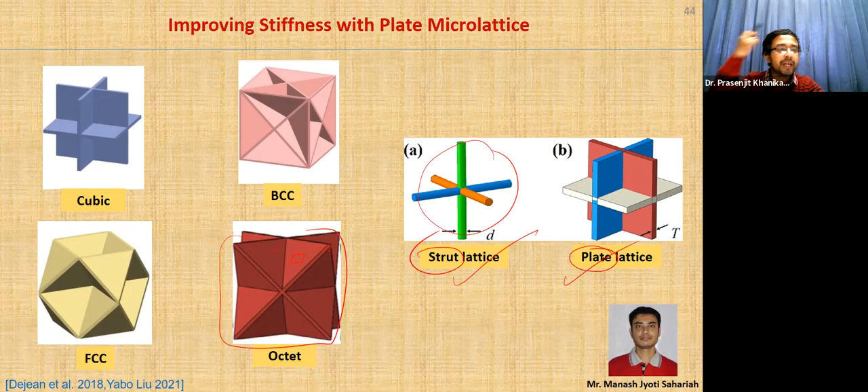Now the powder also will not be entrapped inside, and we are getting reasonably good mechanical properties like strength and stiffness. This is another one of my students who is starting this work in the biomedical field.

If you see, total hip replacement is very important nowadays, but many people even die because of hip fracture, especially old people. But the problem here is the estimated lifespan of these implants is 15 to 25 years - it may even be 10 years.

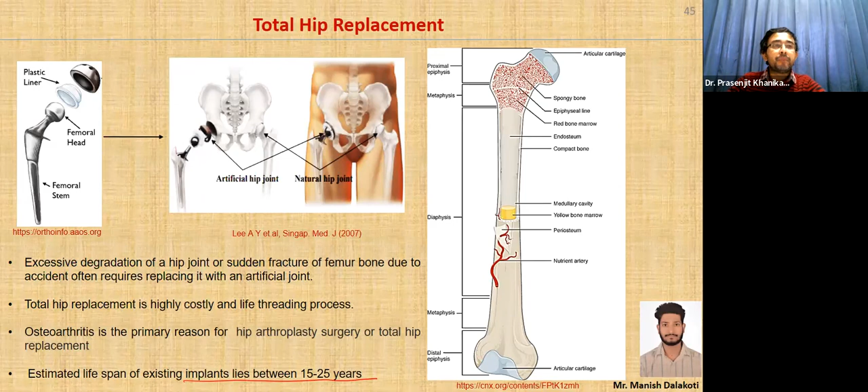So what will happen if, suppose, a young patient - let's say a 40-year-old - has some hip fracture? Then this will last only, say, 10 or 15 years, it may not be 25 years. So at age 50 or 55, he again needs to go for re-surgery. So people are trying different kinds of implants.

These are commonly used: cemented and porous, what they call porous coated. The implant will be like this, and some coating will be there. Only this portion will have some pores so that the outside bone material sticks to it.

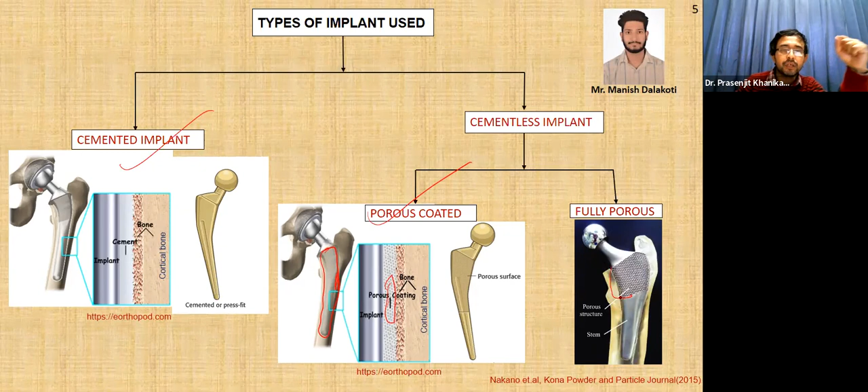But now people are doing research - some European universities are doing it, and we have also started that - so it can be fully porous, you can see through it. Like this same microlattice, we are putting it here. We have the preliminary stage of this, and it has several advantages, which we don't have time to discuss.

But there are limitations as well, because it may not have good fatigue strength. If people can make it though - although research has been done in Europe and other countries - it is not yet used. But I'm sure that in 5-10 years they will succeed in using it.

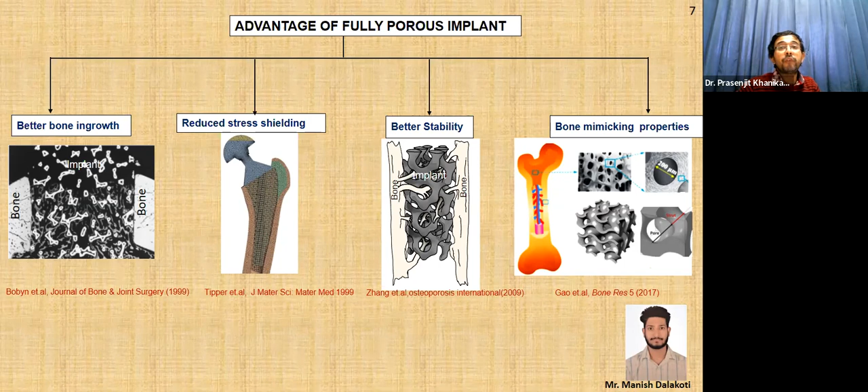And then for bone, especially for a young person, not an 80-year-old, you may get bone ingrowth - the bone will go inside these lattices, and that may reduce failure and extend the lifetime of this implant. We are starting this metallurgy work with my PhD student, Mr. Hritaban. That is also interesting.

There are also surface defects and other more advanced issues, but we still want to play with these things because research is ongoing. Why are we not getting good metallic structures in 3D printing? Because we have not been able to get good microstructures. Researchers are still working on that. Maybe it will take 10-20 years to get very good mechanical properties. People are still trying hard to change the metallurgy.

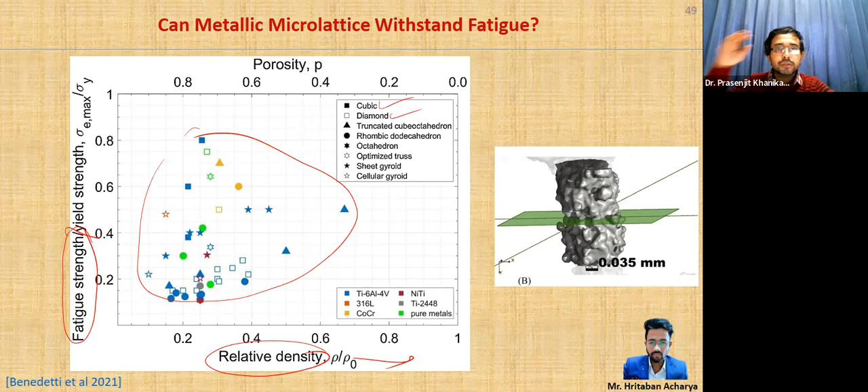I want to show you fatigue strength, which we are trying to understand with density, using different kinds of lattices like cubic, FCC, BCC. If you divide fatigue strength by yield strength, that ratio is very important. For example, if your yield strength is 10 megapascal but fatigue strength is low, even if you put it in a hip implant where the human needs only 10 megapascal, the fatigue strength cannot take that when you walk thousands of times a day. That is the problem of these porous implants - people have not been able to control the microstructures well enough.

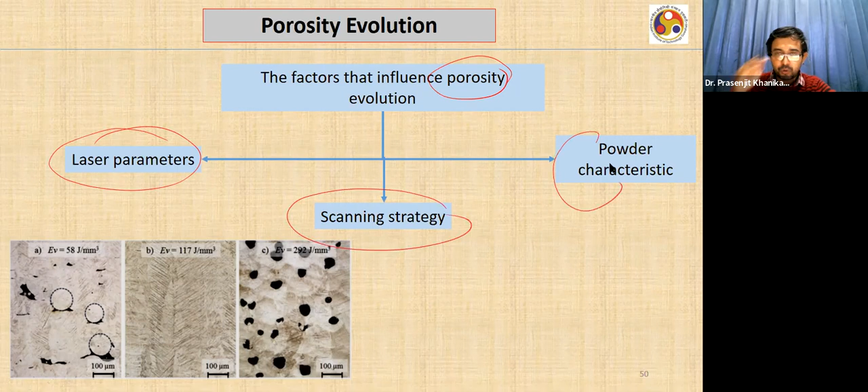Metal 3D printing is still in the development stage, and there are factors that influence porosity. If you have more pores, companies may claim 99.7% relative density, meaning only 0.3% porosity, but what they claim may not always be true - there may be more porosity, maybe 1%. We need to control the laser parameters, the scanning strategy, and the powder size. Scanning strategy means how the laser scans in different ways - that strategy is also very important.

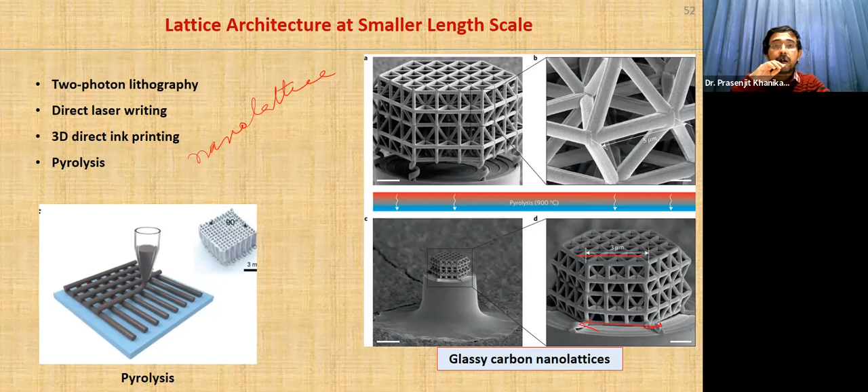Multi-material microlattices are the future. You could put steel in one part and aluminum in another part, which may be possible with the rapid advancement of 3D printing. Then there's multifunctional design - you need mechanical metamaterial, or maybe electric or thermal properties. There are some thermal metamaterials where if you heat it up, it will not expand because of the structure. So multifunctional design combines mechanical properties and thermal properties together.

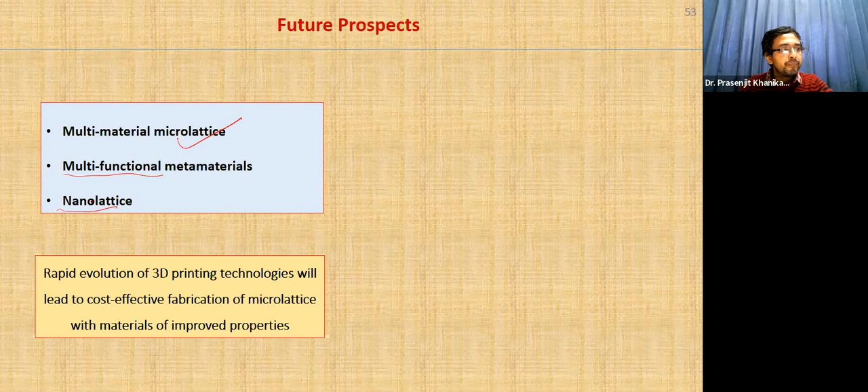So metal is one kind, ceramic another kind, polymer one kind, and the mixture of it is composite. The metamaterials concept comes in everywhere. You can make this kind of lattice structures from metals, from ceramics, from polymers, from composites as well, so this is very important. You can control the structures and get different properties, lightweight structures. If you want ceramic, you do it; if you need metal, you make it. But the only problem is now it is very, very costly. But with the rapid evolution of 3D printing, I'm sure that cost-effective fabrication of this will happen.

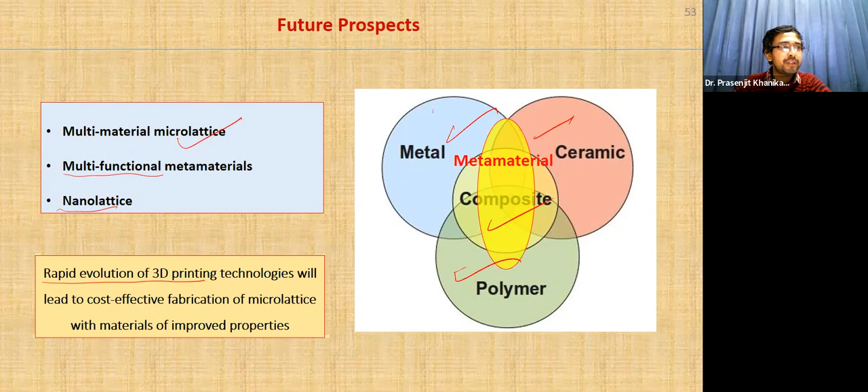So on a positive note, I want to end. When I was in school, maybe 20 years ago, one page to print actually took 10 rupees. Now everybody has a printer at home. Similarly, nowadays with 3D printers, people are getting 3D pens, and even in schools kids are getting 3D printers. So I think in 10-20 years, metal printers will become less costly and we'll be able to make metamaterials. I hope in 10-20 years you will get furnitures made of metamaterials, let's say polymer metamaterial microstructures. That will be surely possible - lightweight furniture, so that you can probably lift your bed like this and throw it somewhere else. That can happen with the advancement of 3D printing becoming less costly.